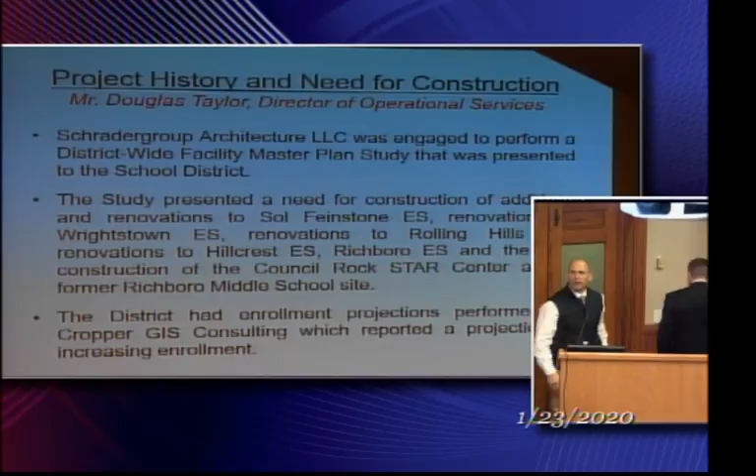Thank you, Rob. Good evening. So a little bit of a project history and the need for the project. Schradergroup Architecture was engaged to perform a district-wide study quite some time ago, prepared a lot of information and assisted us in determining the direction that we're heading tonight.

So the study did present a need for the construction and renovations of the Sol Feinstone Elementary School. As you're likely aware if you've been following the projects, that also included the Wrightstown Elementary School, the current renovations to Rolling Hills, the future Hillcrest and Richboro Elementary renovations, and the Council Rock STAR Center at the former Richboro Middle School site. And the study was based on projections that were prepared by Cropper GIS Consulting.

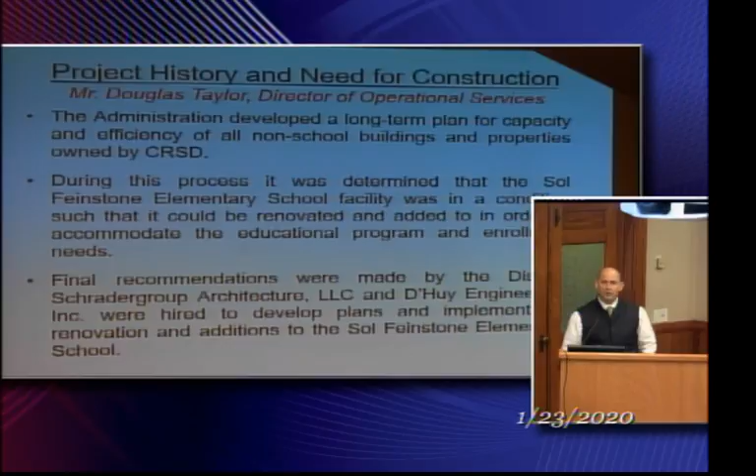So the admin developed a long-term plan for capacity and efficiency of all the non-school buildings and properties owned by Council Rock. During the process, it was determined that Sol Feinstone was in such a condition that it needed full renovations and some expansion, primarily to replace the displaced spaces that are being renovated that were substandard in size. The net gain will be about 5 additional classrooms, which David will review with you shortly.

The final recommendations were made by the district, and Schradergroup Architecture, along with D'Huy Engineering, were hired to develop the plans and implement the additions and renovations to the Sol Feinstone Elementary School. With that, I'm going to turn it over to Arif Fazil.

Thank you, Mr. Taylor. So I'm going to cover options considered, and essentially at Sol Feinstone there were 3 primary options. One was simply a variation. The first one was the one that Mr. Taylor mentioned, which was essentially to renovate the existing building and add program space to accommodate the educational needs as well as the enrollment requirements of the school.

We went through an exercise of looking at that, and that was essentially option A, and that was a total of $30 million as a total project cost. We also looked at a variation of that in terms of modifying the site and the various traffic movements and parking lots, and ultimately that was adding approximately $1.2 million. That was a $31.2 million project, and it was determined that the value of that wasn't necessarily commensurate with what benefits the district was gaining.

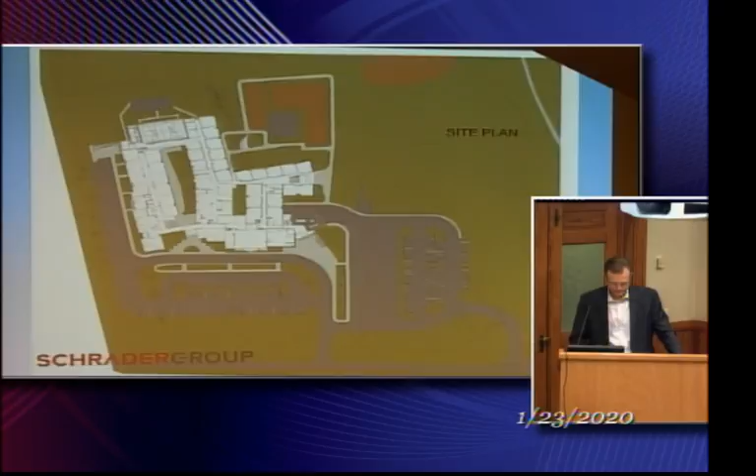One last thing about the site: the total proposed parking spaces will be 171, and when you take into account event parking that can use the bus loading area, we'll be allowing up to 231 parking spaces on the site.

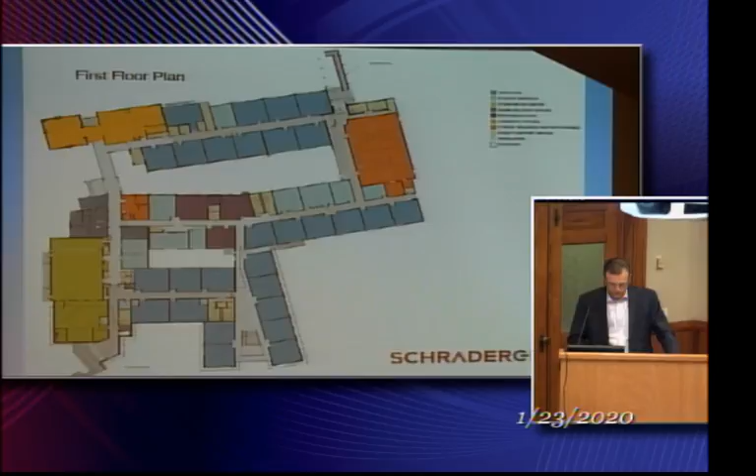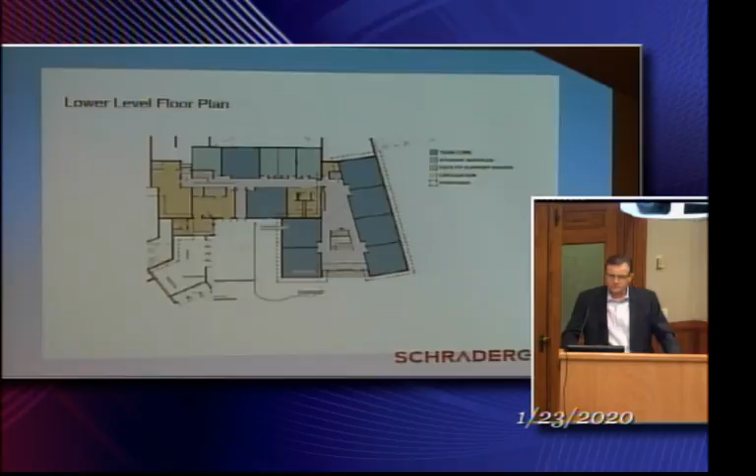This is the upper floor plan, or entry floor plan, and as the grade drops off to the side, this is the lower floor plan. Again, the hatched area is the new construction portion. We'll be taking the existing classroom wing and modifying it to allow for new mechanical spaces, additional classrooms, small group instruction spaces, and new bathrooms in the middle.

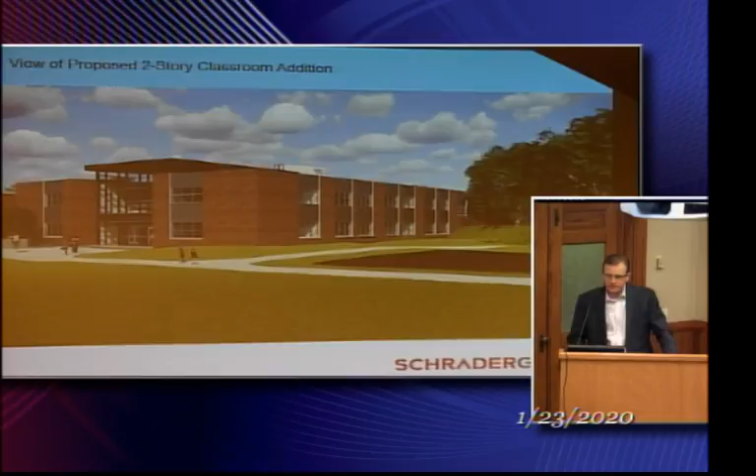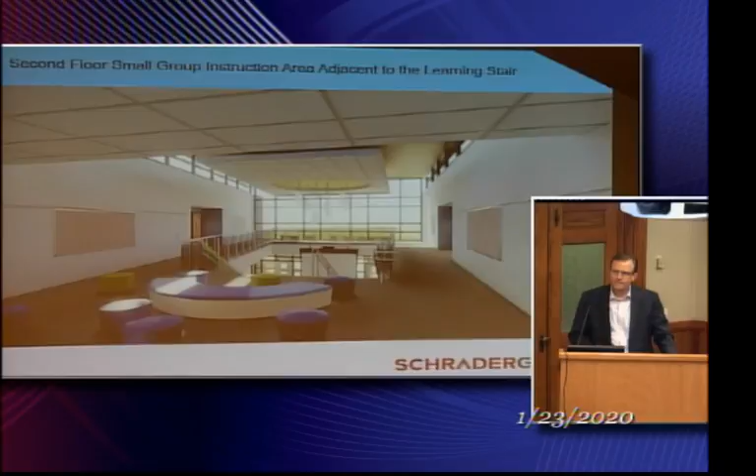Just a couple of views of the interior. This is a view of the second floor classroom areas with the learning stair structure, and a view back to the outdoors looking towards the Upper Makefield Township building, showing the learning stair and some of the small group instruction space that will be available there.

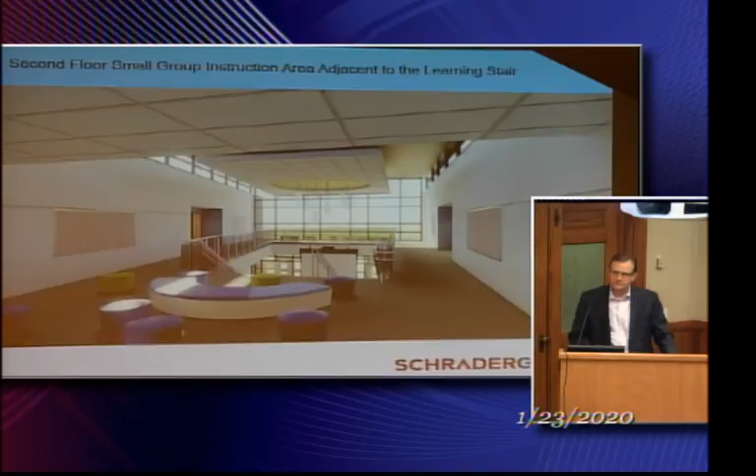These images show the new classrooms, with a view towards the teaching wall with some of the cabinetry and casework. And if you turn a little to the left, you see more cabinetry and casework, and another view of those classroom wings.

One last point: all of the existing classrooms will be renovated to look just like the new classrooms, so the entire building will look like a new structure within.

I'm going to hand it over to Mr. Bazil for the estimated project costs.

Thank you, David. So for the estimated project cost, just a couple of footnotes before we get into that. The project was submitted for PlanCon A and B approval. However, PlanCon is under moratorium, so the project has not been accepted under the PlanCon rules at this time. The project has also been submitted to the township for the necessary approvals, and those are in good progress and will meet the project schedule.

The project has gone through a lot of reviews with the design team, and many of the systems and options being implemented are based on the best value to the district. The timeline is to bid the project publicly, competitively, with the multi-prime approach required in April of 2020, with construction starting in July of 2020, and due to the phased project, completion in the fall of 2023.

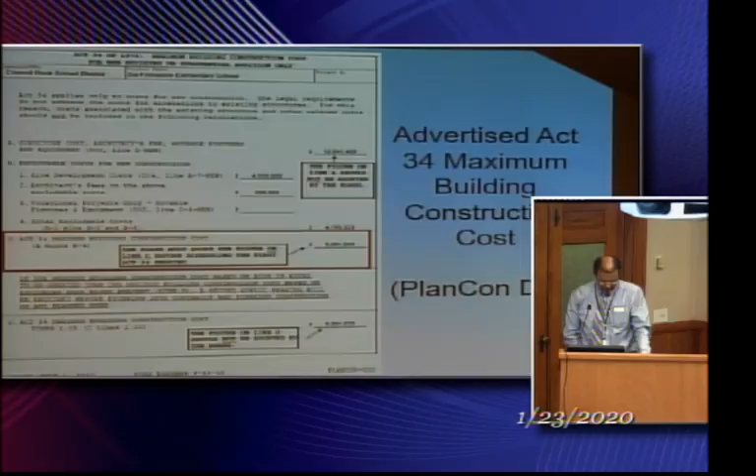Those are the footnotes. In order to comply with Act 34, we went through the PlanCon documents. Here we're showing PlanCon D forms, which on D03 include all project costs, including financing, showing the total project cost, which I'll summarize. We also went through the Act 34 requirements of the PlanCon forms to establish the Act 34 maximum building construction cost, which I'll also summarize.

As adopted by the Board of School Directors, the maximum project cost is $34,207,210, and the maximum building construction cost is $5,881,083.

The project will also be bid with a number of alternate bids, everything from clerestory windows to floor finish alternates, canopies being considered, and sod, as well as value engineering alternates like engineered fill and other alternates we are still currently developing as a team.

So at this point, I'm going to turn it over to Mr. Willard to talk about the budget. Thank you. My name is Zach Willard with Public Financial Management.

We're the district's independent financial advisor. As the independent financial advisor, it's our job to analyze the different financing alternatives available to the district to fund the project. We analyzed cash or a short-term loan, a general obligation bond issue, a local authority bond issue, and a financing through the State Public School Building Authority.

After determining that cash was not an option, we looked at a general obligation bond issue and the State Public School Building Authority issues. Due to additional costs associated with both the local authority and the state, it was determined that the best route for financing this project will be a general obligation bond issue.